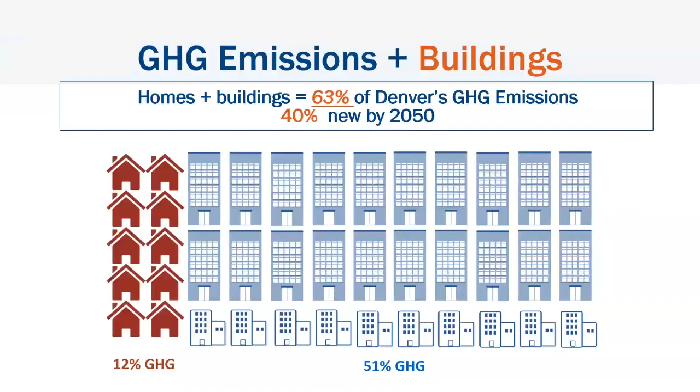So one of the big areas is through greenhouse gas emissions. We know that homes and buildings are responsible for 63% of Denver's greenhouse gas emissions, which is a lot. We also know that 40% of the buildings that are standing in 2050 will have been built between now and then. So we know that our energy codes matter a lot because our new buildings matter a lot.

That's not to say that existing buildings and cleaning up the grid aren't important. Both are. The Office of Climate Action, Sustainability, and Resiliency, which I'll just call CASR for the rest of my little talk here, is doing separate things related to getting the grid cleaned up, with a hope that we'll get to 100% renewably sourced energy in Denver by 2030. But Xcel needs our help to do that on the grid. So I'm not going to talk about the existing buildings work and grid work today. Just know that it's happening alongside the new buildings work.

Our goal through the work that we're doing with the codes and beyond the codes is to get our design and construction community acting together towards really having much better built outcomes where our buildings perform as we intended. And that involves getting performance considered from the very, very beginning on every project at the same time that aesthetics are considered.

This isn't a new concept. This is something that the AIA floated out as a core necessary piece of our work in the architectural community a couple of years ago. We're just embracing it here in Denver. We know that we can't just pass a bunch of new codes and say, okay, here you go, community, now just make it work. We know that the market and the regulations have to move along together, and so if I gave the full-length presentation of this, you would hear me say about 200 times that we're working in conjunction with the community.

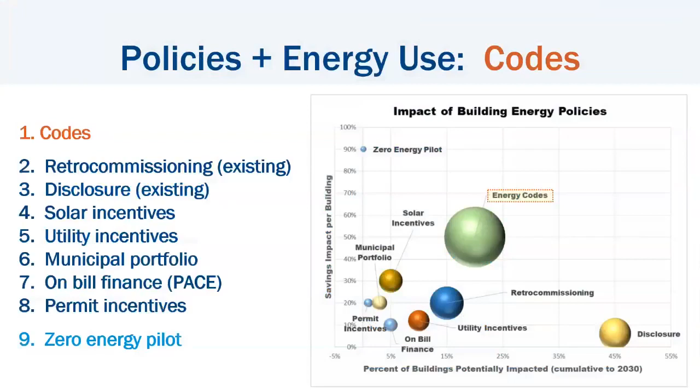The reason is because the big green blob represents all of our buildings that follow the mandatory base code. It's really important to have high-performing buildings that show us the way, that are individually going above and beyond voluntarily, but the bulk of the impact happens through the buildings that follow the mandatory base codes. So we have to focus on getting those codes more aggressive.

The CASR office pursued funding a couple years ago, and so it's worth mentioning that funding through the American Cities Climate Challenge. 25 U.S. cities that are moving faster than some of the other cities are sharing $70 million worth of funding over the course of 2 years. And as part of that, we were fortunate enough to have the Institute for Market Transformation come out last October and help evaluate how we're doing relative to IECC compliance as it stands today in our plan reviews and our inspections, as well as our built outcomes. They've made a series of recommendations to try to help us to get to better built outcomes.

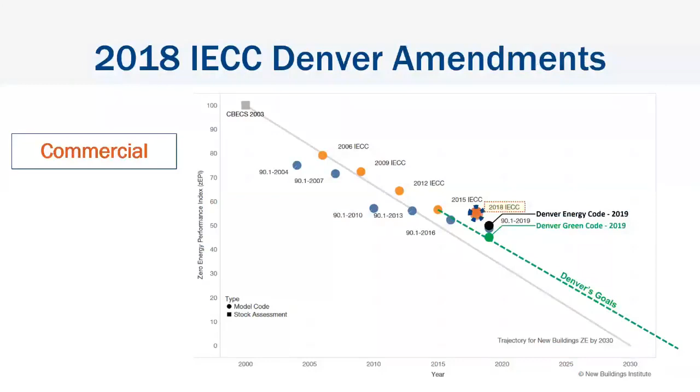At the same time, we're working on updating our codes during each of the 5 code cycles, and including the 2019 amendments to the IECC. This trajectory shows Denver's goals, and it shows that the IECC at the national level is not on track with Denver's goals. The same is true for the residential as it is for the commercial.

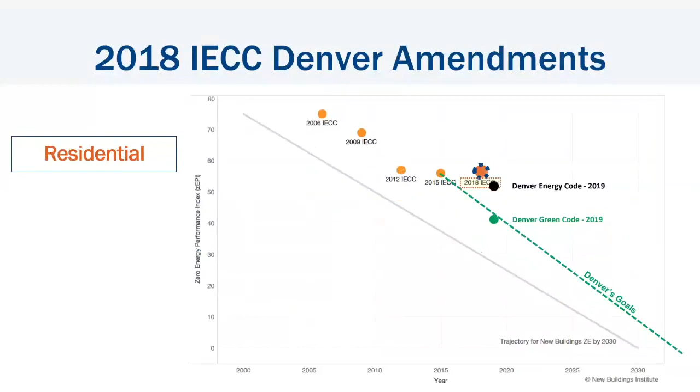Which just means that we will have to write amendments in Denver to get our codes to keep us on our trajectory towards where we want to be. So in 2019, we used the code amendment process as a learning experience, and we got to about 15% better than the national codes, but that wasn't quite enough to even get us tracking towards our goals.

And what that told us is that in future code cycles, we will have to work with the community and with our committee to figure out which amendments are the most achievable under the umbrella of a goal that we need to get to, because we know that we'll have to raise the bar 10 to 15% per code cycle to get to our goals, and we'll just have to find the right collection of amendments, not consider each amendment individually in a bubble, but consider each amendment individually in how it can fit towards getting to the goal that we have for that cycle. And it might mean that more workforce training is needed, or that there are other resources that the community needs.

At the same time, we're going to be looking at the Denver Green Code. We used this as a learning experience this go around as well. We have put a bunch of things in there. On the energy side, it pushes about 10% beyond base code. And it offers two opportunities. One is for projects to voluntarily follow a higher bar and a higher standard and show leadership in the community, but the other is a preview, because the provisions that are in that Denver Green Code are most likely to be moved to mandatory base code, or to be considered to be moved to mandatory base code, in the next code cycle. So it gives everybody a chance to know what's coming.

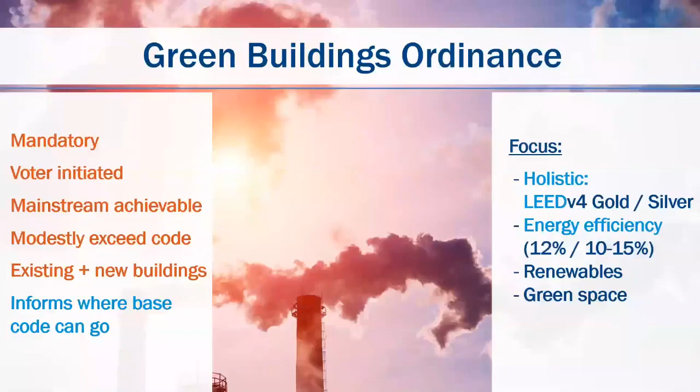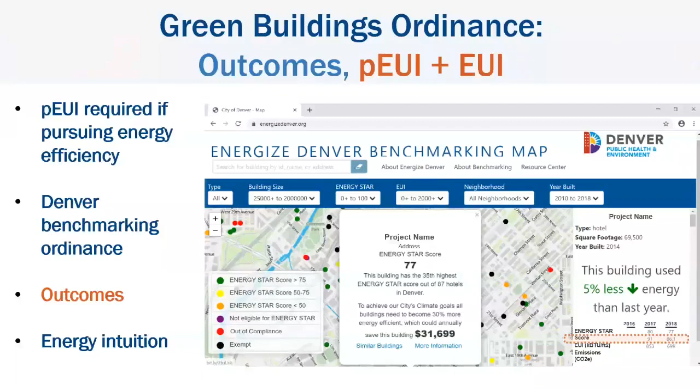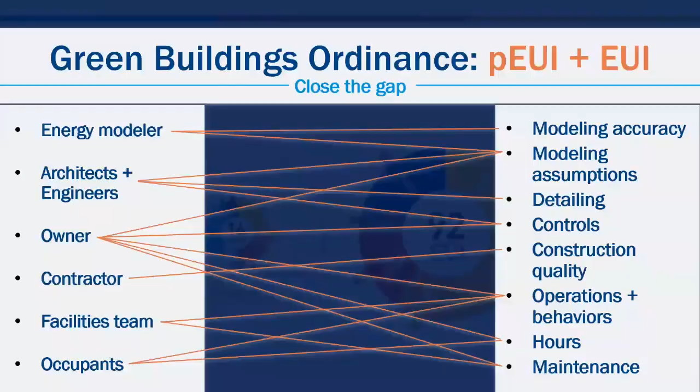The reason why we're so focused on outcomes is we've been seeing predicted energy use and actual energy use on buildings to be very different. Sometimes, we see buildings using 2 to 4 times as much energy as they were predicted to use. So there's a really big gap right now. That gap is not attributable to anybody's failure or any team member's failure. It just takes a really big collaborative process to close that gap. So we'll be working to help everybody close that gap so that we can support our community goals and the health and welfare of our citizens, all of our citizens. Because ultimately, we see the goal of equity, affordability, and sustainability as one goal. We can't have one without the others.

So there are a bunch of other things that are going on beyond our code work that support our code work. I'm not going to really talk about that, but just know that if there are things in your mind that you know are happening in other cities, we're definitely looking beyond just the codes. We know that it takes kind of an elaborate network to get to high goals.

We know that if we can take advantage of some of the opportunities at the planning level, that will set up our projects for success, easier success at the building level. So we're looking there as well. And we're looking at all of the aspects of sustainability in the design of our buildings, not just energy. Just that energy is the focus today with IECC. Ultimately, though, the big focus is how do we get all of our building projects contributing positively to the future.

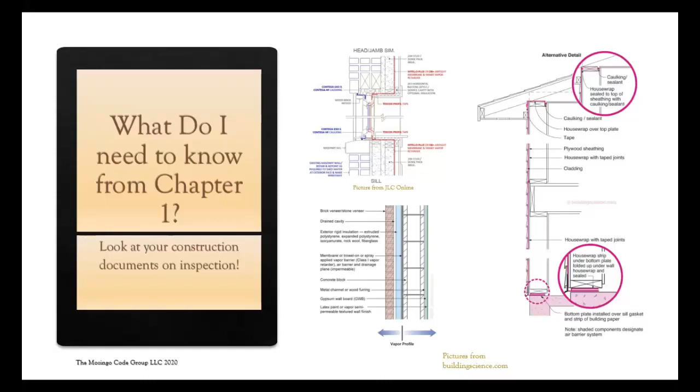Look at these details from JLC and buildingscience.com. You can see what they're using and where it's going to be, so maybe, just maybe, it will actually be constructed that way. It's important to look at details like this and see where the air barrier is, where the vapor barrier is, and what they're using, so we can make sure that air sealing detail gets done.

Because now there are blower door requirements in commercial buildings and air barrier verification we're going to talk about, we really need to make sure that, yes, at plan review it's definitely on there, but at inspection that they're doing exactly what was called for on the plan. So just make sure you're comparing the plans to what's actually being constructed in the field.

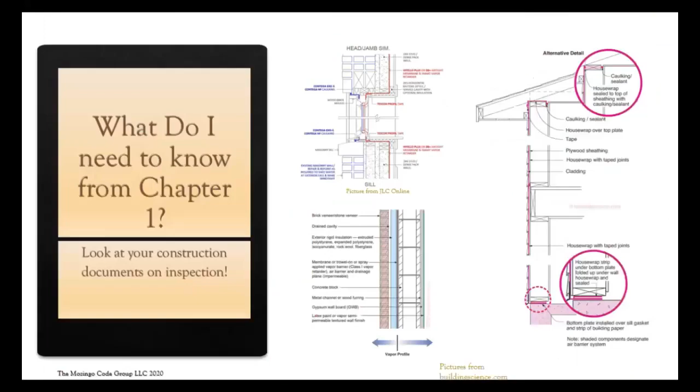Another thing in 105 is the final inspection. I know inspectors know this, but sometimes we don't just have inspectors on the webinar, so I want to point out the code says the building has to have a final inspection and can't be occupied until it's been approved. Some people don't realize that.

It goes further to say that buildings or portions of buildings can't even be considered for a final inspection until the code official has their preliminary commissioning report. You need to make sure they've got that preliminary report before a final inspection, because at final inspection you're going to be required to turn in your final commissioning report.

So these are some things in the code. The final inspection has to include verification of the install and proper operation of all the building controls, whether that's lighting or mechanical. We have to show that they are there and they work, so just make sure you have all that.

When you go to final inspection and pick up that final commissioning documentation, it comes with a checklist letting you know what errors they found and that the non-compliance parts have been corrected. That's specific, that's in Chapter 1.

It's just a good resource to have. It's good for builders to know that inspectors can call you on that, and it's good for inspectors to know that it's there and they can call it on that.

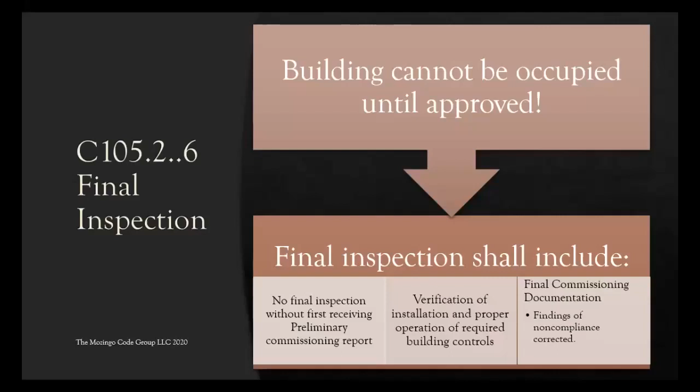So Chapter 2 has some good definitions you want to become familiar with, some new ones. If you're a mechanical inspector, you'll want to see the definition for direct digital control, DDC, because it's mentioned in 403 when you get into VAV and multiple zone systems.

I imagine it'll be the building inspector and probably the electrical inspector who will be looking at the electric vehicle requirements in the code. There are some electrical requirements for sure, but there's a lot more when you get into those electric vehicle provisions that talk about parking spaces dedicated to electric vehicles in both accessible and non-accessible spaces. So looking at the number of spaces required, there are different types of spaces required.

When we get into that, it's important to know that terms like electric vehicle ready and electric vehicle capable are defined in Chapter 2. So becoming familiar with Chapter 2 is important in this section. It's also important to know, as a commercial inspector, that the definition of a residential building has changed.

That affects you because R2s, multifamily buildings, got taken out of the residential chapter, and now all multifamilies, doesn't matter 3 stories or less, 4 stories or more, all multifamily buildings are commercial according to the Denver Code. So just making sure that you know you're going to be looking at all multifamily as commercial under these commercial requirements now. It kind of makes it easier on people to just have one set of requirements to comply with, but it is a change.

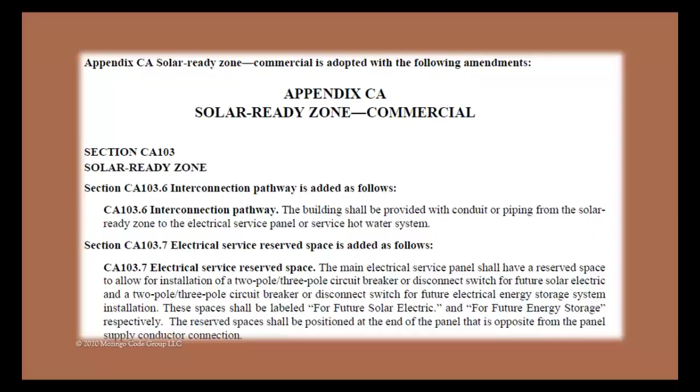So, all right, we've gotten past this appendix. We know everything has to do that. So there's options in the code for how you comply. How do you get through compliance?

And yes, that again seems like a plan review question, but it's not. There's some things in there that you need to know as an inspector, on when people have made what choices, so that you can verify them.

It's changing, and so it's important to know that. Whenever we offer options in the code, there just becomes a lot more we need to know. But if we didn't provide options, it would be really hard to get a building built. So we want to provide those options and flexibility so people can choose what works for them.

All right, so we know we have the appendix to comply with and what you have to look for. Now let's look at those options.

There's a prescriptive option. You have the option of going with ASHRAE 90.1. You have the option of going with the energy code. And within each of those, you have an option to go prescriptive or performance. So we're going to take a little look at them.

Prescriptive for this code also means things like ComCheck. So it's just important that inspectors and plan reviewers be working together right now, with the designers and with everybody, because yes, ComCheck is going to write a new version specific to Denver's amendments, but it takes a while to do that. And until that happens, this code goes into effect in July.

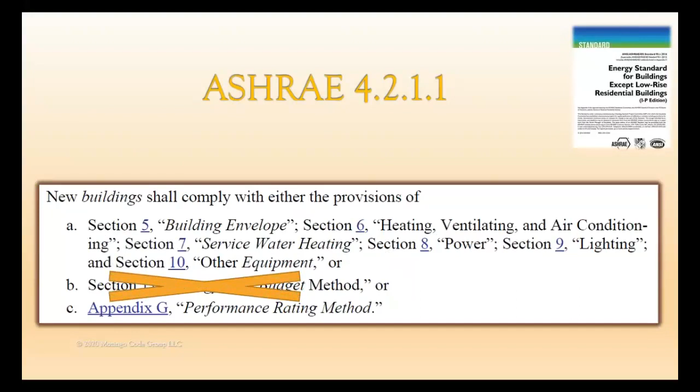So what does that mean, really? If they use ASHRAE prescriptive, you just have to make sure that they went above the minimum in two of these areas, right? Hopefully it'll be called out on the plans which two they chose, because they have to choose two of these in order to be equal to ASHRAE or to IECC. Somewhere on the plans they'll identify which options they chose, and you'll just need to verify that in the field. They have to choose two.

Typically people would normally pick mechanical and lighting options. It's not as hard to go with 75% of the lighting being higher efficiency or higher efficiency mechanical. But with the new requirements that you have to do blower door testing and air barrier verification most of the time now anyways, option one might be just as easy to choose. So it'll be interesting to see what designers do.

I like how Christy touched on how they're going to kind of keep track of what's working and what's not, and always take that into consideration when they're moving forward. I'd like to see this part being tracked to see what are the most popular choices, what are people choosing, why are they not picking the other option. These are just good things to know when you move forward with new codes.

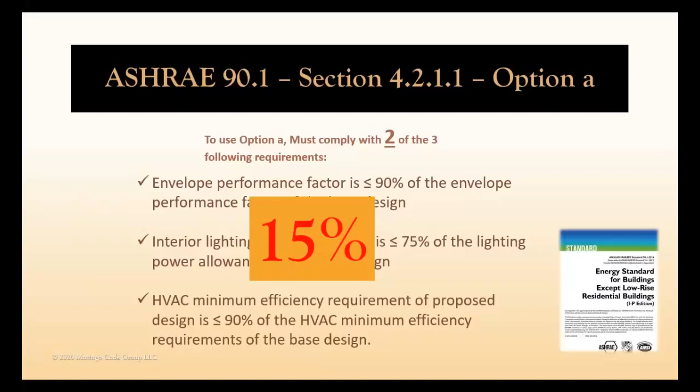There is an option to go prescriptive out of IECC, which also requires that you follow the mandatory items in the code. That's always been the case, since IECC and ASHRAE both have their own mandatory requirements. If you're going with ASHRAE for the Denver code, you do their mandatory requirements, but you also do the air leakage and commissioning out of the IECC. But when you're in the IECC, you do all of those mandatory requirements no matter what path you choose. Mandatory just means you can't trade it off—these are things you have to do no matter what.

I know the word mandatory kind of messes people up, but it really just means these are things that can't be traded off. So the path hasn't changed a lot, other than being sure you follow Appendix CA for the Denver amendments.

We're going to look at those Denver amendments, but I want you to see what's going to be required as an inspector if somebody chooses IECC prescriptive and those mandatory items too. The first part is complying with C406, the additional efficiency packages. We'll look at it in more detail later, but just know you have to choose two of these packages. This was originally put in the code in 2012 to get more efficiency out of a building, while giving the designer and building owner the option of how they get that efficiency.

Each cycle more options are added to the list. We started with 3, then went to 6, now we have 8. With the Denver amendments, you just have to make sure you choose 2 of the options instead of 1. This is mandatory if they go prescriptive, including ComCheck. Until ComCheck catches up with the amendments, you'll need to look over the plans to see which 2 they chose and verify they actually completed them. ComCheck has a place that tells you what they chose, but only a place for 1. So you have to make sure you're looking for 2 until the new ComCheck comes out. With these 2 options, you could be looking at about a 15 to 20% reduction in efficiency if they're not done, so we really want to be sure we're getting these verified.

There are different options, the same as what's in the code. The only amendment is that you choose 2 instead of 1. You could go with 10% more efficient mechanical equipment, 10% more efficient lighting power density or better lighting controls, a dedicated outdoor air system which handles your ventilation separate from the heating and cooling equipment, a better water heating design or some solar thermal, which only applies to buildings that use a lot of hot water, not everybody's allowed to choose that. You could do some on-site renewables, and it has to be on-site.

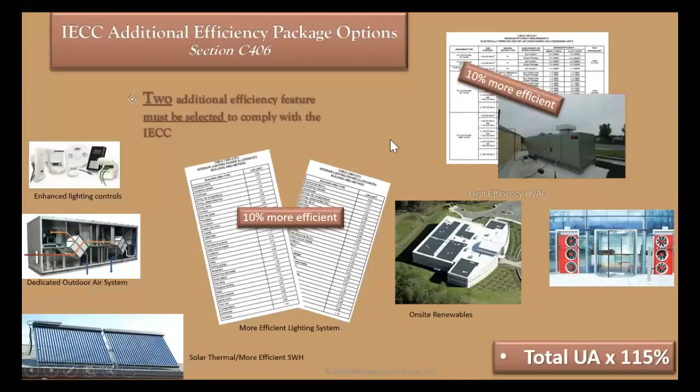So just make sure you're aware they have to choose 2. Somewhere on the plans it has to be identified. I'm sure Denver has amazing plan reviewers, so I'm pretty sure they'll make sure you know what was chosen.

IECC also has a performance option. C407 is the performance section of the code that tells you the difference between the standard reference design and the proposed design and how you calculate that. But you still have to do the mandatory options, including commissioning. You would inspect from the plans and the performance report, which should match, but sometimes they don't, and sometimes plan reviewers will just send the extra documents with the plans instead of making designers put everything on the plans. Denver's pretty good, though, they have some energy sheets they require, so they do a pretty great job of verifying energy.

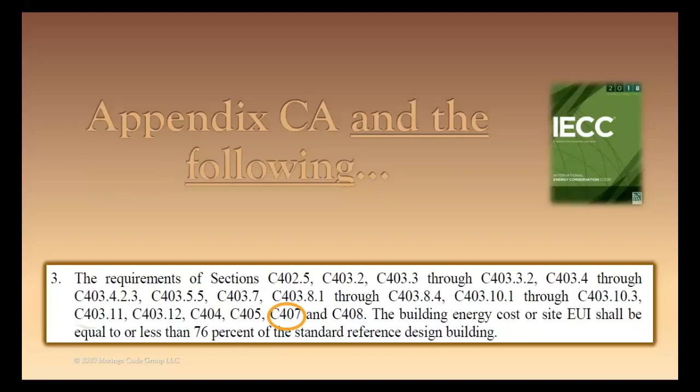So it's important to know what's mandatory and can't be traded off, and to look for that. Let's walk through that, because there's a lot that's mandatory. 407 is your performance path, but everything else is your mandatory requirements. And if you look at it, don't forget you have to do your air leakage.

That's 402. 402 is always envelope. 403 is mechanical, so look at all of those mechanical requirements, right? And then 404 is water heating, 405 is lighting, and 408 is commissioning. There's a lot there. We just kind of want to walk through that because we don't want to miss those. You're going to be needing to look at them.

So for the envelope, a lot of stuff there, right? Air leakage is mandatory in any compliance path in just about any code. We're going to dive into this a little bit later to see how it affects inspections. I just want to point out that many times when someone uses the performance path or a trade-off path, they use a third party for verification. So you want to be sure that they are looking at these mandatory items, including them in their model and in their report. No matter what, you'll need those reports that we'll be talking about in a few sections.

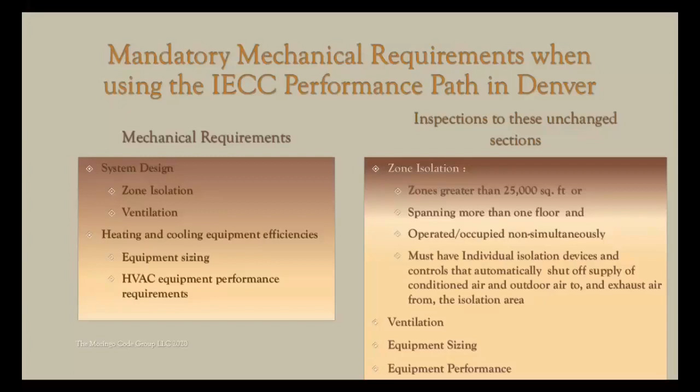So I think that a lot of times things change, what you can buy or things change as you're under construction, and we're not making them go back and redo their load calcs or redo their COMchecks or whatever, to make sure that it still passes when things change in the field. And so it's important to make sure that those match.

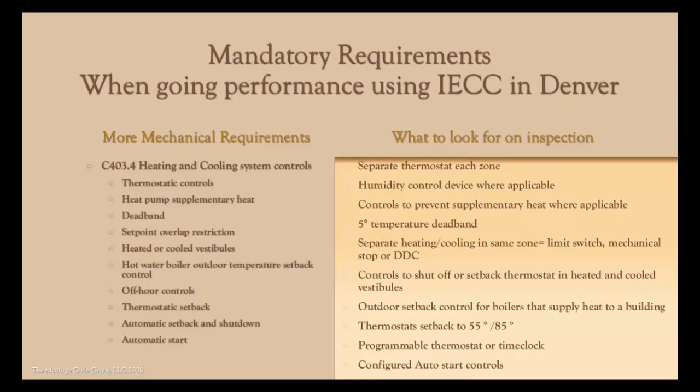Or is Jane going to go turn up the thermostat and then John is going to go turn it down? Everybody plays with it, and pretty soon there's no efficiency to be had because it's been messed up. So it's important to verify these control requirements. There's a lot of efficiency to be gained right there in those requirements. So I would just challenge you to take a couple times to open some thermostats and look in them just to see.

Some more mechanical. You noticed on that list there's a lot of mechanical.

So economizers, fault detection, huge. It's easy to climb on a roof and see if there's an economizer on a rooftop unit. You can see it from across the roof. But do you open it to see if it's hooked up? Do you open it to see that it's got its fault detection device? Do you look to see that everything's hooked up and that it's working? Because economizers are only good if they work.

And so demand control ventilation, do you have CO2 sensors, or you have your parking garage ventilation where you're not just bringing in a billion CFM because it's a big parking garage, but it's shut down and it's never going under the amount of CFM that would make it hazardous, right? There's always going to be sensors and things to make sure that it's not hazardous. But are those things being looked at?

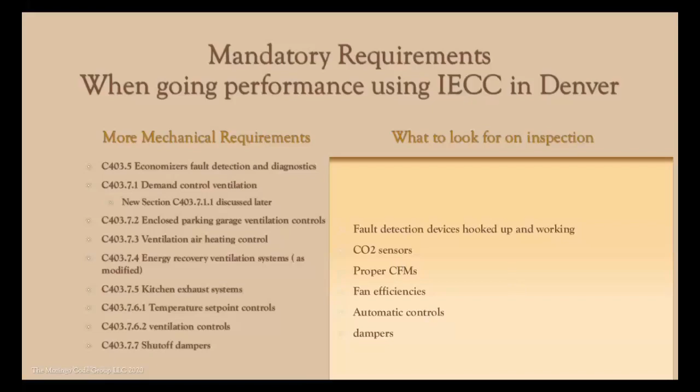These are the things I put over here to look for on inspections, the things that I'm finding people are having trouble doing. The efficiency, those are big old fans sometimes. What are their efficiencies, right? Do they have their controls? Do you have your automatic dampers? So there's just some things in there to make sure that you're really looking at. Those are mandatory requirements that can have a huge effect on a building. So looking at that.

Some things that are harder or less common to look at: I hardly ever see anybody crawling down to see what is the horsepower on the fan motor to see if it's within the limits, right, or the brake horsepower, or what was the efficiency of that fan. I've just not seen very many people willing to do that. It is a code requirement. It's a mandatory code requirement.

But let's look at refrigeration equipment performances. Those are pretty important. Making sure that your coolers and your freezers are airtight. They're insulated. They have the right lighting controls, so they're not just on all the time. They shut off when somebody leaves or when customers aren't there trying to buy something, if it's those display type cases. So those are pretty important. You can imagine walk-in coolers and freezers that don't have an airtight seal around the door, where you could be wasting a lot of energy. So some things to make sure you're looking at there.

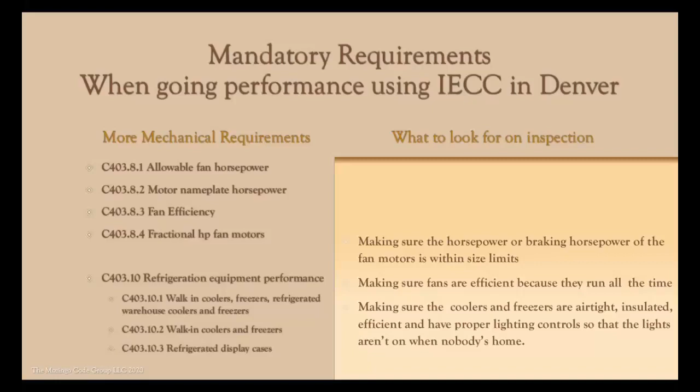And of course, you're always going to have your duct system. Is it properly constructed? Are all the ducts sealed? That's mandatory, that all the ducts are sealed. There's still not a requirement for a lot of duct testing in the commercial section unless it's a high pressure duct, but duct sealing is still mandatory.

Duct insulation, if it's outside the envelope or within the envelope, there's just different requirements, so making sure that that's met, and your HVAC piping insulation. We're not talking about service hot water piping. We're talking about the piping on your mechanical equipment. Is it insulated the way that it's supposed to be? Those are pretty easy things to verify on an inspection usually.

And then, of course, anything outside the building. Your heating outside the building, your snow and ice melt, your freeze protection, do they have their automatic controls? It seems minimal, but just picture a snow melt system that has this huge boiler running all the time because it didn't have a temperature sensor to say, oh, it's warm enough outside to melt the snow, so I don't need to run. Or the sidewalk is warm enough, I shouldn't be running. It's this boiler that's just running all the time. Huge energy efficiency waster, right? So just making sure that those controls are on there.

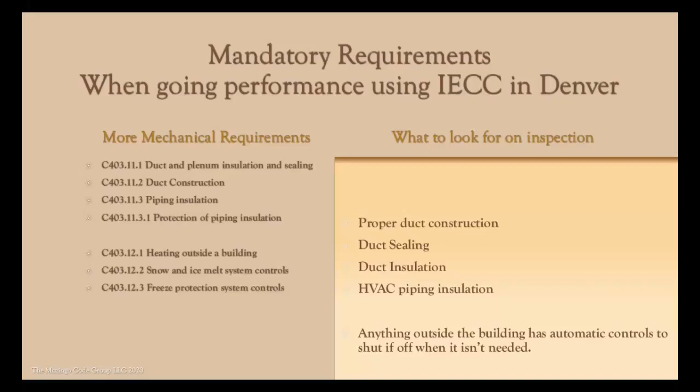That's not a new requirement, but we just need to look to make sure they're there. Service water heating requirements haven't changed, making sure that you have your heat traps, your piping insulation, and the right efficiencies of your equipment.

Very rarely do I see the water heating supply piping requirements enforced, where you either have to do a certain amount of volume through the pipe or a maximum distance for your piping from the fixture to the source. Very rarely do I see that enforced, but it is there.

What I see is Denver has an amendment for your water heating system that says if you have those big, huge water heating systems over 1 million BTUs, this is in the code, but there are some Denver amendments to it. If you have these big systems that have to heat water, this is your service water heating system, not necessarily for conditioned space, but for the water heating.

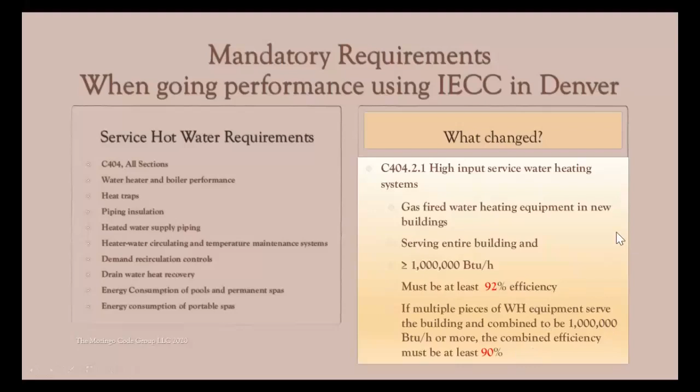If you have those big systems, they need to be high efficiency. And if you have a bunch of pieces of equipment together to equal that 1 million BTU, you need to at least be 90% efficient. So you need to think about efficiency. That's a requirement in there that you need to be looking for.

Lighting hasn't changed a ton. You're always going to have your controls. Lighting controls is huge. The lighting power densities, the light bulbs we're using these days are kind of taking care of the lighting itself.

We used to be worried about all those old light bulbs that put off so much heat they added to the load, so we had to cool even more because those light bulbs put off heat. That's kind of taking care of itself with the new technology, right? We have lower wattages being used, and that's great.

We still keep track of it so that we're being diligent in that process. But where more of the lighting in the studies I've done is being messed up is on the control, and that's the problem with inspection of lighting.

Who does it? Is it the electrical inspector? He or she may be looking at how things are installed and whether they work and are appropriate, but are they looking at whether this room required an occupancy sensor and this one required daylight controls, and that they work together and this occupancy sensor isn't messing with the daylight control? Is that being looked at a lot of times?

A lot of times on electric plan review, you have to decide who's going to look at the energy code requirements. But on inspections, what I have inspectors tell me a lot is, 'I'm an inspector, I inspect to the NEC, that energy code is not my code.' And then if you go to the building inspector, they're saying that is electric.

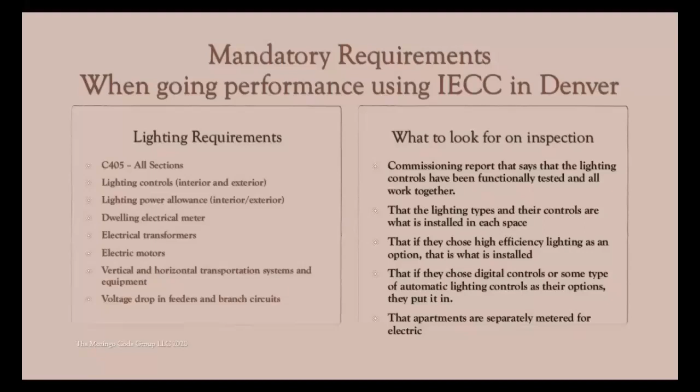Commissioning is a mandatory requirement in the code for all paths. Make sure you're looking for that preliminary report. It's supposed to be done at a final mechanical inspection, and then before final building, you get that final report and that commissioning checklist. Denver has amended the commissioning checklist, so make sure you're getting the right one that's in the code in C408.

You're not going to be out there doing the commissioning, and there's specifics on who can do that, but you're just looking at the report. Did you get those reports and turn them in?

Commissioning is huge. When you have big, huge pieces of mechanical or hot water or heating equipment, it's important that the owner is getting what they paid for, and that somebody is looking at all of that and making sure it all works, noting where the settings were set on each thing, so that if enough people over time mess with the controls, it doesn't stop working.

I've talked to commissioning agents, and they say if you come in after the fact and try to troubleshoot and figure it out, it's tens of thousands of dollars to figure out what went wrong. But if you've got a manual that says when it worked, here's where everything was set, here's our sequence of operation, here's everything you need to know, then at least you can go back to that starting point where everything worked. So it's so important to get that.

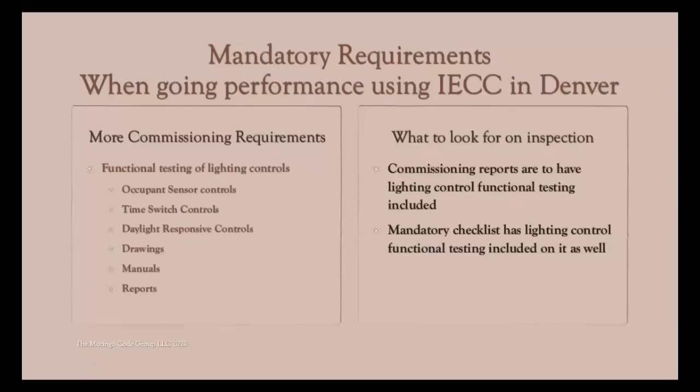Then I just wanted to give a brief on ComCheck. Denver, or ComCheck PNNL, has agreed to write a ComCheck for Denver's amendment. It's in the process, and it takes a long time to write that, so you will be able to see that for Denver eventually, but as far as I know, it's not finished.

So you're going to need to make sure you're looking for those two efficiency package options and the amendments for the window U-factors and other things as they are now in the amendments, not what a typical ComCheck would show. You could get a ComCheck to pass right now in Denver, but it's looking at the code unamended, so you wouldn't be able to take that pass at face value until they change it.

So it's really going to be important for plan reviewers and inspectors to work together to make clear what's required and what's being chosen. It's also important for designers to put this on the plans so we can see which two options on 406 you chose, what kind of lighting and windows you chose, because the program isn't going to be caught up yet.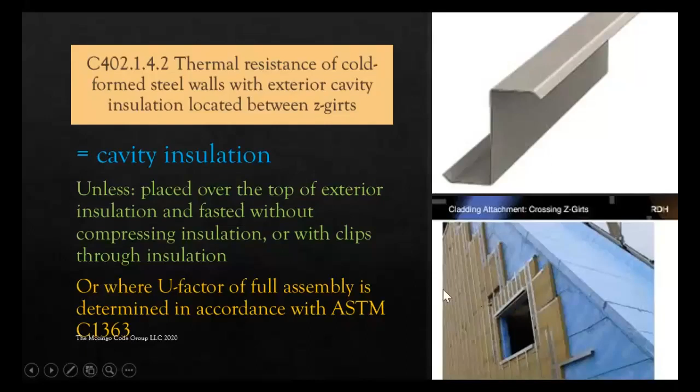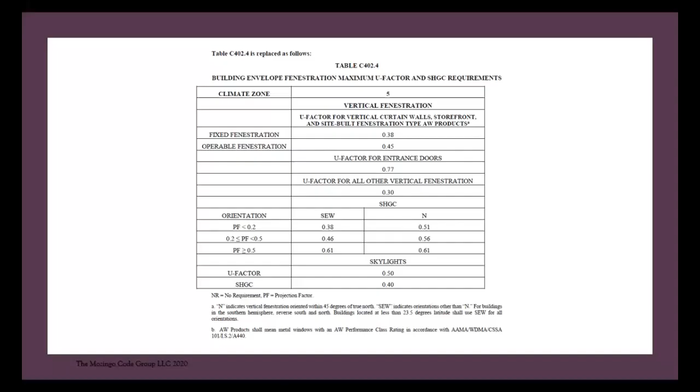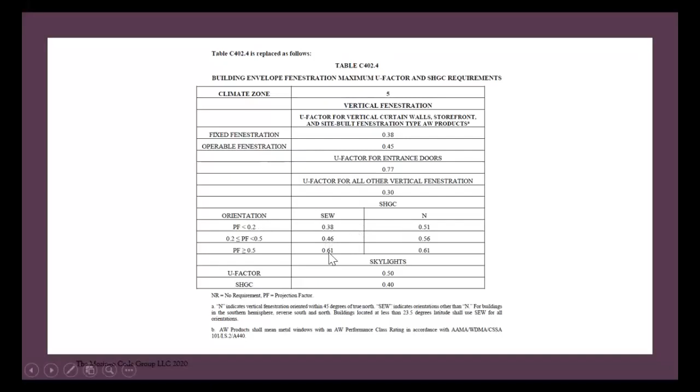So they say they put in a worse window because they have this big projection, and you go out there and there's no projection. Sorry, you need to put in a better window. That doesn't mean we're going to automatically make them yank out their window. It means you need to redo your calcs, redo your comp check, redo your performance report, and make sure you still pass. But you didn't put in as good of a window as you could because you said there was a projection and there isn't one.

That's all. Windows have a huge impact. Solar heat gain coefficient has a huge impact on the size of equipment that goes in there. How much heat is making it through this window? The air conditioner is going to have to offset that. So windows are hugely important, and in commercial buildings we use a ton of windows.

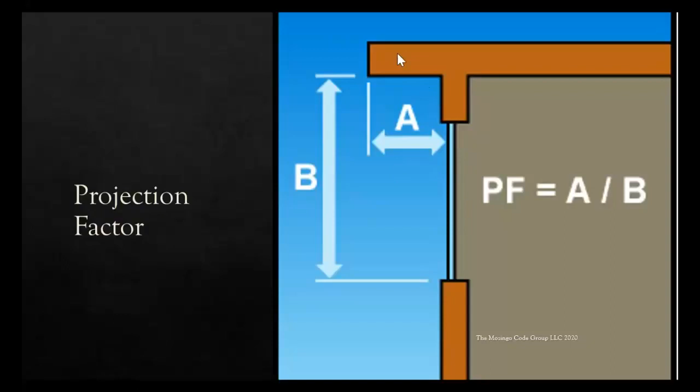I would say in a climate zone 5, it's as important, if not a little bit more, than the U factor. So make sure that if they say, we're going to put in a worse solar heat gain because we have a projection, that they really do have a projection. I just want to point that out.

All right, let's talk about the envelope. Denver's really putting a lot of thought into this. It's great. The 2021 code is going to have a lot of this in there too, so you're going to be a step ahead. But Denver's doing a lot better even than the 2021 for the most part.

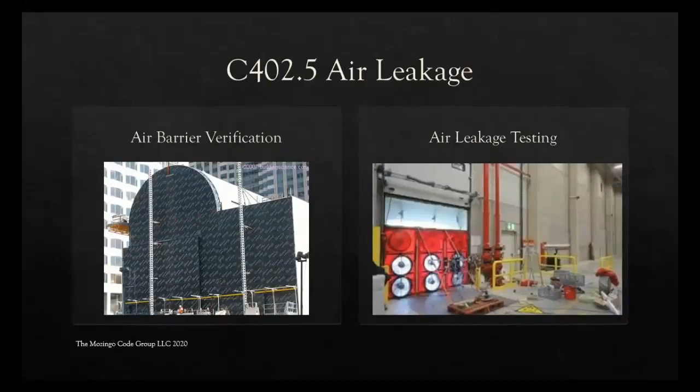So let's look at this. There's been some thought, and I love that this is in there, because a lot of people got a parking garage with sprinkler pipes running through it, and they're trying to figure out how to keep those sprinkler pipes from freezing. I see all kinds of things. People say, well, I'm going to heat that. I'm going to build a plenum and heat it. Oh, you have a heated space. Guess what? Now you have to meet the envelope provisions.

Now you have to do insulation and air barriers. Oh, but I don't want to do that, I want to have a drop ceiling so I can access those sprinkler pipes. Well, you can't put insulation on a drop ceiling without an air barrier, and if you just met the code, it's almost impossible to do. So Denver looked at that and said, wait a minute, is there a reasonable way to handle this issue? And I think they came up with one, and I really like it.

They're just saying, okay, you don't have to put that air barrier down. You can heat this space and get your insulation values, but you need to put a minimum of R5 on the slab and a total of R19 in the floor. And if you do that, you can do away with the air barrier. That layer of R5 insulation on the slab is going to serve as your air barrier, pretty much.

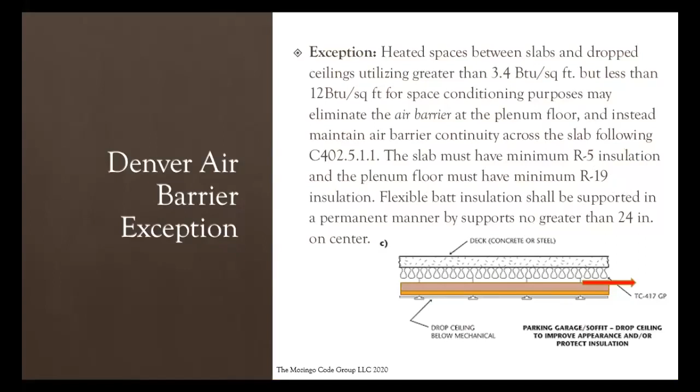I shouldn't read code at 5 in the morning. That's what that teaches me.

All right, so air barrier compliance options. If you're an I occupancy, you still have the option of doing the material option, the assembly option, or actually testing it. If you're anything else, then you're going to do air barrier verification.

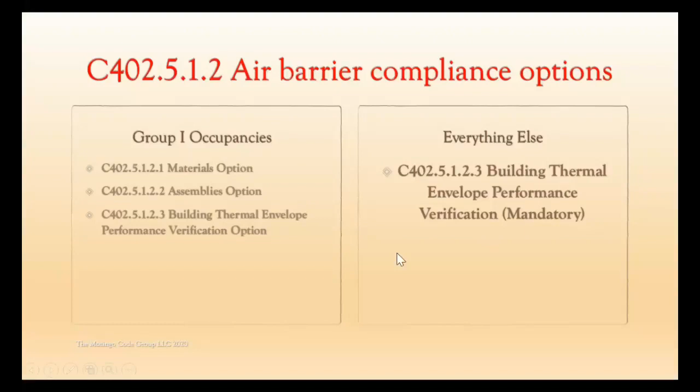So let's look at what that means. If I'm Group I, I still have this option of making sure that the materials I choose are sealed and continuous. All of these different materials in the code you can still use; they're deemed to comply as long as they're sealed. Just making sure that if you choose plywood, it's 3/8 inch, but are you sealing that plywood? Are you sealing it up and making sure you're sealing everything? Otherwise, that's not an air barrier. But you still have this option, only for Group I occupancies.

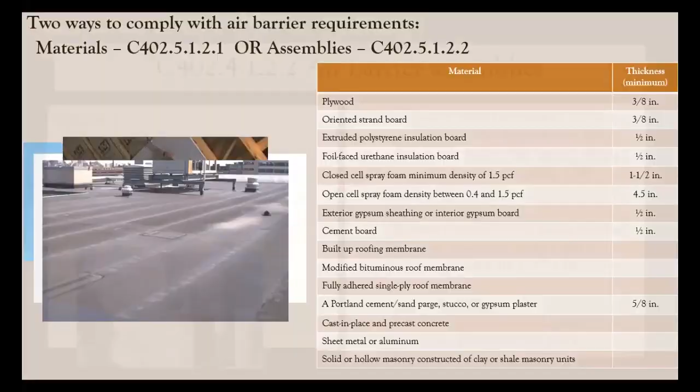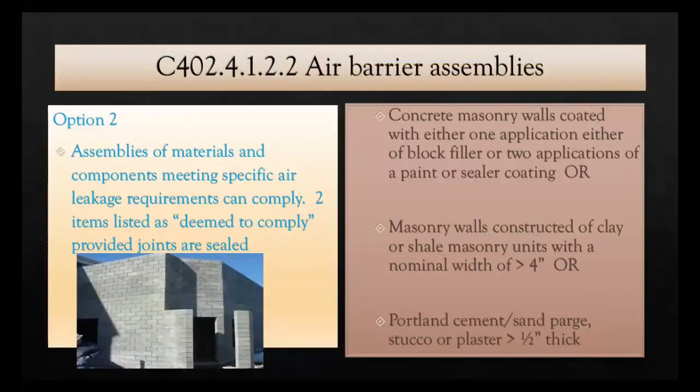Or you could do the assembly and materials components. So if I have an assembly, concrete itself is permeable, so I need to have some coating, plaster, or stucco. I have to have something on there, but the total assembly is now airtight, so I still have that option. The problem is when you get into buildings, it's really hard to see where your air barrier is going to be continuous.

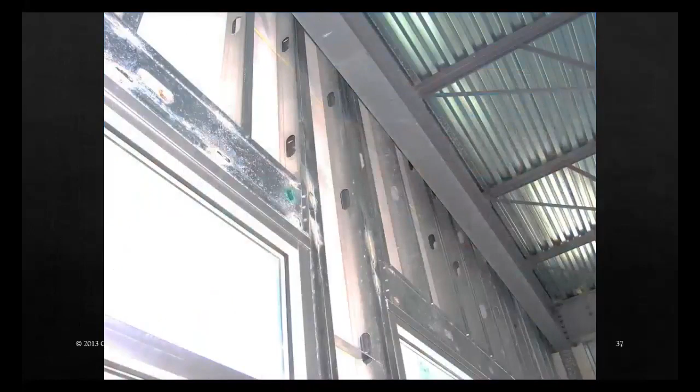I get these buildings, and it's hard to verify where my roofing membrane on the top is going to meet and be continuous with whatever I'm doing in the wall, and how I'm going to get a continuous air barrier in some of these locations. It can't be an afterthought. So making sure that you're getting those.

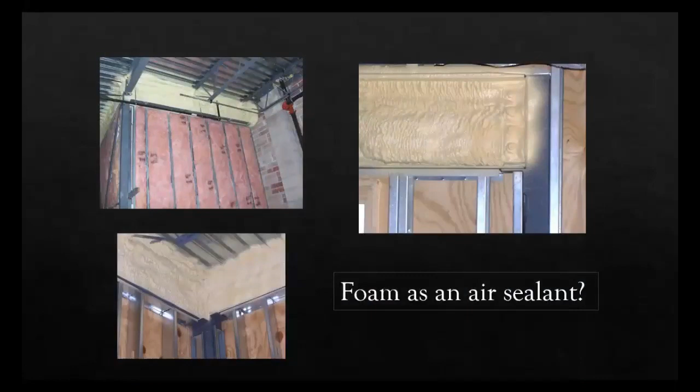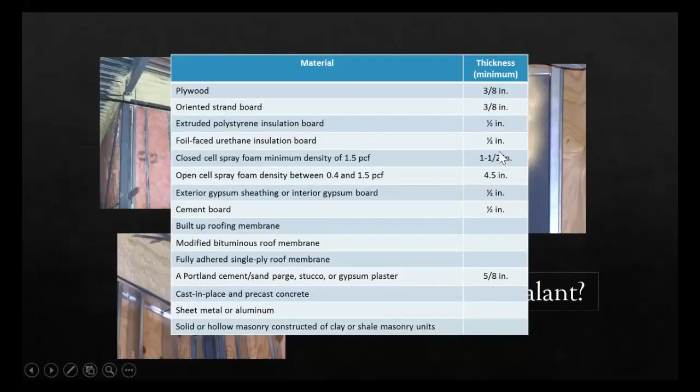A lot of people use spray foam as an air barrier, which you can - that's totally fine. It's just that, remember, to be an air sealant, if you look back in the code section, it says I can use open cell as an air sealer, but I have to have 4.5 inches of it just to be the air sealer. I can have 1.5 inches if it's closed cell foam. So just making sure you're looking for those products. It can't be an afterthought.

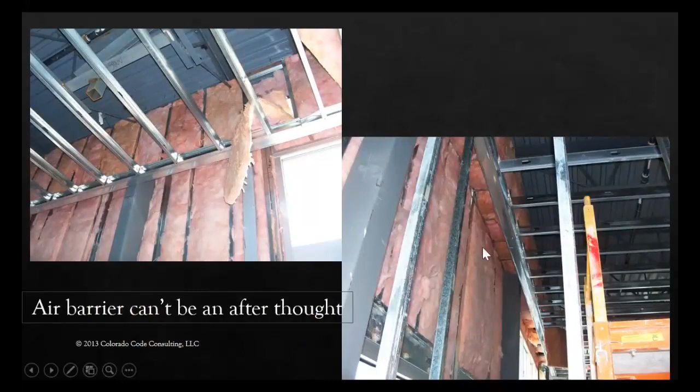You've got to get air barriers where they need to go before you start doing all this after framing, and it's too hard to get up there. Things like this are - we can't have this situation where, how am I going to get that air barrier up there? This insulation isn't going to do its job without its air barrier. So making sure that you get that done.

As an inspector, and designers, there's some good resources out there - go to all of the insulation and air barrier manufacturers' websites. They give you, here's all the different things we've tried, and here's what we found works and doesn't work. You can say, oh, we tried fluid-applied Tyvek on Texas A&M, here's the challenges, here's the solutions we found.

Utilize the resources. A great resource as an inspector that I've had to use is the Air Barrier Association of America. You click on air barrier, and it gives you every manufacturer of air barriers out there, with all of their install instructions and specifications. So that's an awesome resource out there.

But air barriers are still hard and not being verified. So Denver has come up with requirements that you look at your air barriers being continuous. They have to be continuous, and somebody needs to verify them. It says the installation of a continuous air barrier has to be verified by a registered design professional or approved agency. You review the construction documents and supporting data to make sure they've called it out and put those details on there.

Inspection of the air barrier and assemblies have to be conducted during construction while it's still accessible for inspection, so you can verify that any needed repairs have been made. Then that final commissioning report has to be completed - the building commissioning, the air barrier commissioning report - done by that registered design professional or approved agency and provided to the building by final inspection. The report has to identify deficiencies found during the review of construction documents and inspections, and details of corrective measures used.

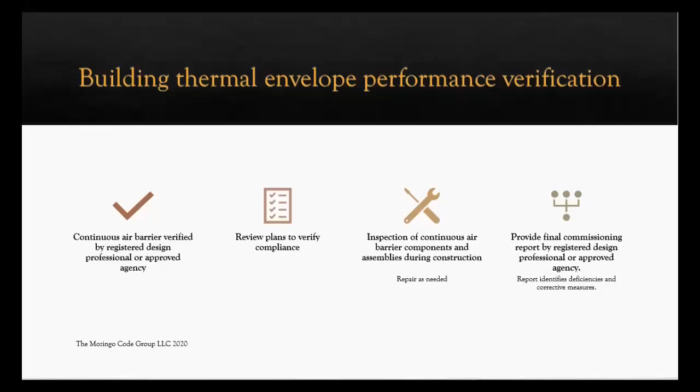But if you don't have to test, there are some buildings that don't have to test. So if you don't have to test, you have to do full air barrier verification. So just knowing that is new to Denver, this verify your air barrier. It's that important.

So building thermal envelope does have to be tested in accordance with ASTM E779. There's some lenience here, like if you're over 0.4, it doesn't mean you automatically fail, like, okay, go redo everything. It means that you're going to need to do a smoke trace or infrared or something, find out where the leaks are, see if there's any measures that can be taken to fix it, and then provide a new report saying what you identified and what you fixed.

Yes, this says, okay, well, maybe I don't have to meet 0.4 CFM then. Yeah, well, you're going to have to go through a lot more time and testing and stuff, and it would be more worth it to pay attention to the details up front. The idea is that you pay attention to the details up front, then you don't have to go through these extra measures. At some point, you won't have this leniency, so this is like a step.

So I would just say that it's better to pay attention to all the air sealing up front. That's why there's verification on that air barrier, right? Somebody go make sure you put it in right, because you've got this blower door test that you're going to have to do now on commercial buildings.

So you don't have to test the entire building envelope where the following are tested. So this is just saying you don't have to test the whole building. You do have to test anything under a roof. So if you have a multi-story building, that top floor definitely has to be tested. Or if you're one story, the whole floor, or you have mixed levels. Anything that has a roof over it, anything that has an entrance or a loading dock, or if you're below grade, those have to be tested.

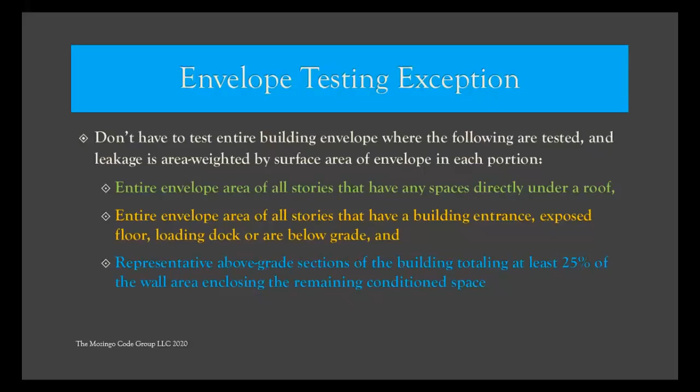And then everything else is kind of a representation, an area-weighted average of at least 25% of the wall that encloses conditioned space. So just know that that's in there.

Rooms with fuel-burning appliances. This hasn't changed a lot. It's just saying that if you have the Denver amendment, right now the code changed to just be if you have fuel-burning appliances and you bring in combustion air, you need to separate them from the rest of the building, and it's just talking about the appliances used to heat and cool the building, and Denver said plus water heating. Right? So water heating, do you like that? Yeah, that's nice. Space conditioning and water heating.

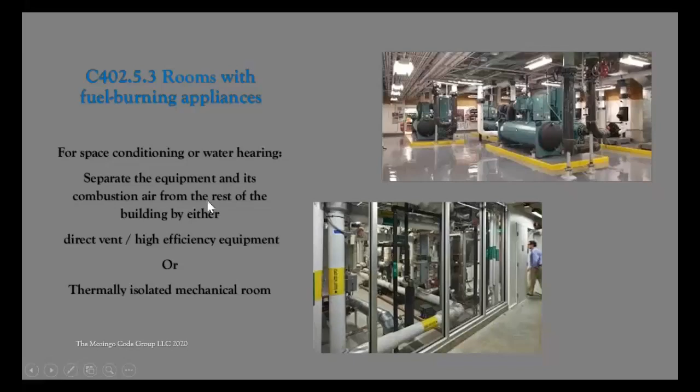So if you bring in combustion air, put that inside of a room and thermally isolate it so that you're not dumping that air into the rest of the building, or put in high-efficient equipment that is direct vent, and the air comes in, goes into the equipment, and is exhausted directly out. No air changes place with the room. So that has been in the code for a long time. The difference is Denver added water heating equipment.

Now, when we get into mechanical, we're just talking about a few things that Denver has changed. It's just really looking at the control of the flow of the outdoor air. So if you think about, like I said earlier, the energy implications of all the air brought into the building, the mechanical heating and cooling has to make up for that, right?

So my research has shown that in commercial buildings, one of the highest contributors to energy costs is the amount of outside air that we're bringing in and the equipment that has to offset it. Doesn't mean we don't bring in air. It just means that we turn it down and that we don't need as much, or we control it. If I have to bring in 5,000 CFM of outside air at the temperature that it is outside, my air conditioner is going to have to offset that, right?

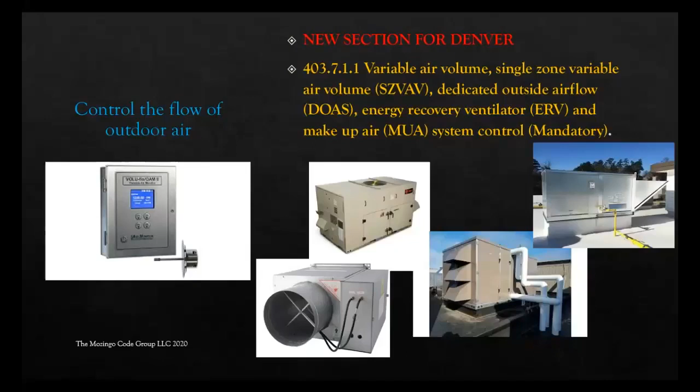So why not? We're going to design, again, according to the mechanical code, but we're going to control that air. So it's just saying when you have this equipment, whether it's a DOAS or a VAV or energy recovery, whatever, your makeup air unit, you're going to have to put some type of equipment on there to control that's designed to provide fault on excessive outside air and display or report to the DDC, maintain, measure flow rate. So it's just making sure that we are looking at that control air. So that's specific to Denver, something to pay attention to.

The energy recovery ventilation systems is important. There is an amendment for Denver on this. So we've always required if you bring in a lot of outside air, you need to put it through this energy recovery ventilator so that it kind of feels like it's tempering. It runs that hot air across the heat exchanger, pulls the heat out, so you're bringing in cooler air, or vice versa in the winter. Energy recovery also deals with some humidification issues, but usually it only applies to fans over a high rate.

But Denver amended it to also say that if you have exhaust that exceeds 3 times the value, so whether you're bringing air in or taking air out, it will apply. And so those are some things that you're going to need to look at. I usually put a video in right now of how to inspect those energy recovery ventilation requirements, but we're not going to have time to do that. So just make sure that you are familiar with this requirement for Denver on ERVs.

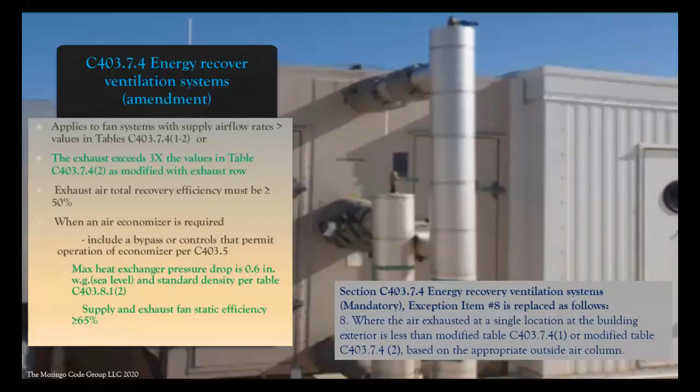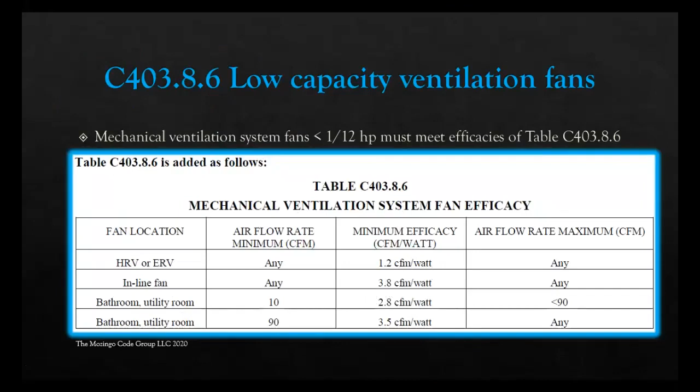And then fans, if you have a low capacity ventilation fan that's used for your mechanical ventilation, doesn't mean every single fan out there. It means the fans used for ventilation, this is the efficacy of them, right? So if you're using a bathroom fan as part of your ventilation system, here's the efficacies required, HRV, inline fans. So that's in there.

And I am really proud of Denver and the marijuana grow facility folks that really worked together to come up with a lot of the requirements that made it into Denver's code, whether it were for mechanical or lighting, because they really went through a lot to get some requirements in there. And so there's just some new requirements for indoor agriculture operations. Doesn't mean it has to be for those grow facilities, but that's why we're putting it in there. So it's any indoor agriculture operation.

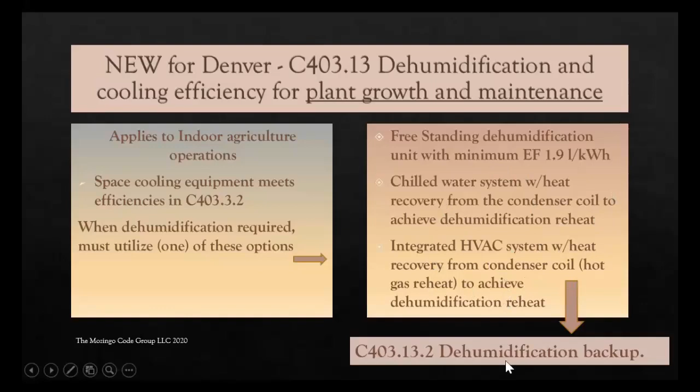Your efficiency of your cooling equipment has to meet the right efficiencies. If you use dehumidification, which most of them do, then you have a separate freestanding dehumidification system, chilled water system with heat recovery, and then it's just asking that you really deal with the dehumidification system that can use a lot of energy and making sure that you're taking all of that into consideration. You will use dehumidification, so make sure that it's efficient and appropriate.

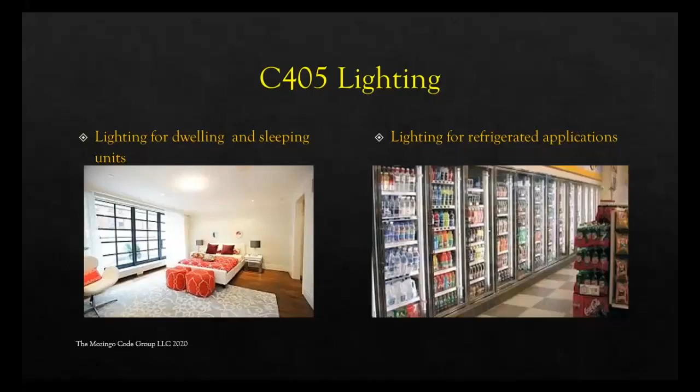Lighting didn't change a lot. Lighting for dwelling units, there's a requirement that not less than 90% of the permanently installed fixtures are high efficacy, and the definition of efficacy did change, so pay attention to that. It's 65 lumens per watt. And then lighting for refrigerated applications, that didn't change. It's always been buried kind of in that mechanical section. So Denver put it in the lighting section too, so that you know that it's actually there. If you have lighting installed for walk-in coolers and freezers, you have to have the right lighting controls and the efficiencies.

And then exterior lighting controls: provide controls that shut the lights off when there is daylight, or reduce it by at least 30% from midnight to 6, or an hour after close of business to an hour before opening, or 15 minutes of non-activity, or put a time switch control. Somehow control the lights so they're not on when they don't need to be. And there is an exception, like if I come out of this dark parking garage, I don't want a bunch of bright light, and so there are some exceptions for lighting required for adaptation.

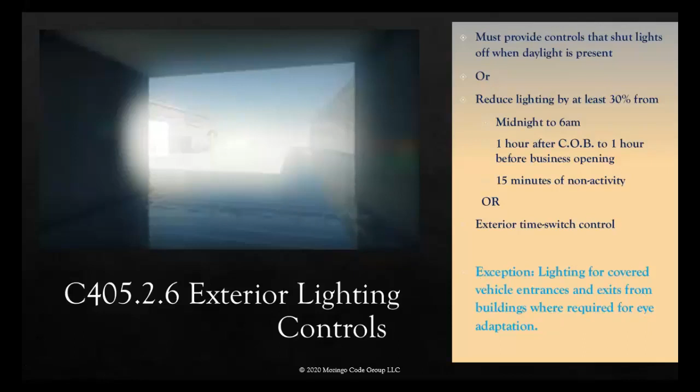And then parking garage lighting controls, just making sure, you have this big, huge parking garage and look at all the lights on. Do they need to be on all the time? Or if they do, we want to get security. We're never going to interfere with security, ever. The code won't let us.

It makes sure that there are provisions in there that we can never interfere with security. That's great, and egress. But does it have to be on full blast? Can we shut it down? Can we shut some of them off and leave some of them on? We just want to make sure that we've put some thought into this, right?

That you have a lighting zone that's no more than 3,600 square feet, so that you're controlling the lights in a smaller section at a time and not for the whole thing, and that they have controls that shut them down when you don't need them. And during the day it can be still really dark inside the parking garage. Great, turn those lights on when they're needed. But next to any of these openings, you don't need lights on because you got daylight coming in. It's just making sure that there's some thought.

How do you do this on inspection? Who's going to do this? Is this the building inspector or the electrical inspector? So we've got to figure that out and look for those controls. But just know that the lighting controls still have to be functionally tested.

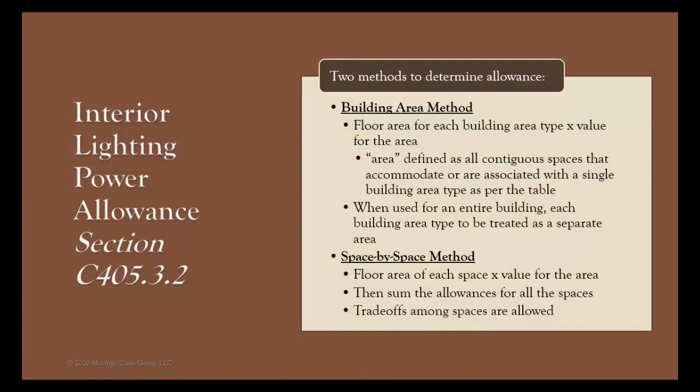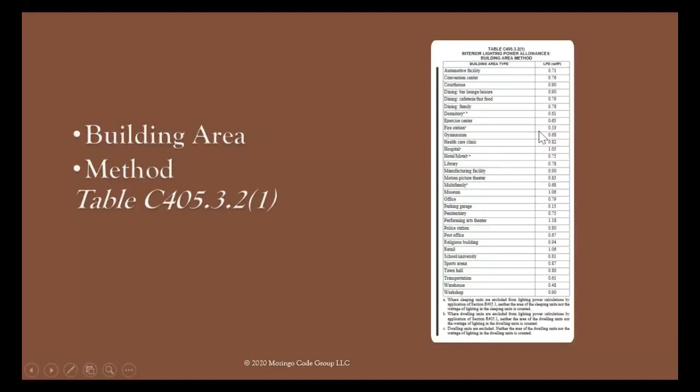All right, lighting power hasn't changed a lot. You still have the two methods. They can go a building area and space method. I don't get into this too much with the inspectors. It just says, building area method, what kind of building are you? Here's how many watts per square foot you are. Just know the plan reviewers jump through a lot to make sure that every building has the right amount of lighting. And same with here, if you're doing space by space, it breaks each space out to say, okay, here's how many watts per square foot each type of space is required. So they're going through a lot at plan review.

And on inspection, you're looking to see, okay, they said they were going to do this much. Are you going to be out there counting every light bulb? Hardly think so. But we need to at least make sure that they're falling in. I see a lot of inspectors that will do random and then kind of weight average it, not count every light bulb, but look in a room. Are they pretty close? In a couple rooms, I can assume they're pretty good, right? But if they're really off, then maybe I need to look at it more closely.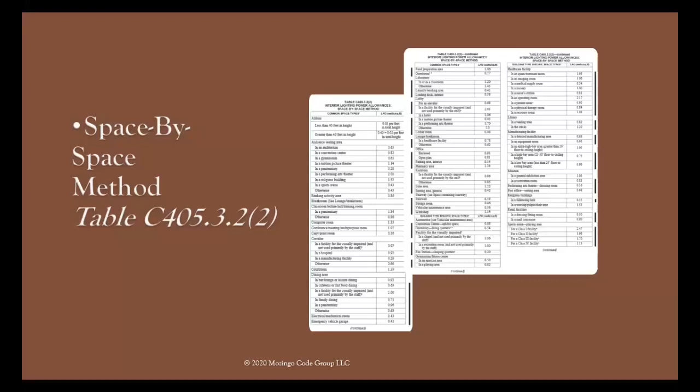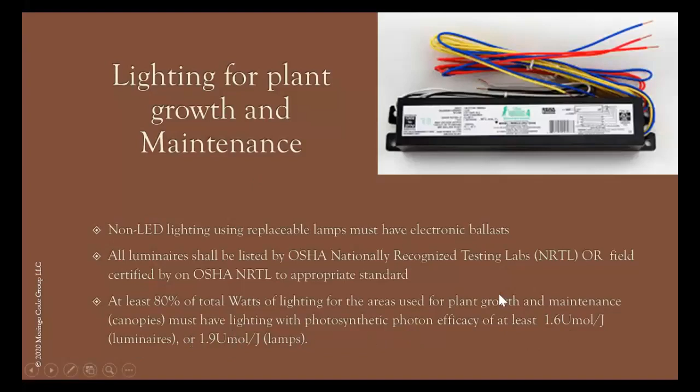Lighting for plant growth, again, such great work with the industry out there on this to come up with these rules about lighting. So if you have non-LED lighting, you have these electronic ballasts, right? And your lighting is in line with nationally recognized standards, and you have some pretty high efficacy lighting, and it's not a watts per square foot. We're talking about moles here. It's a different lighting for plant growth. It relies on a different type of lighting, and still making sure that type of lighting is efficient. So great work with the industry to get these requirements in there.

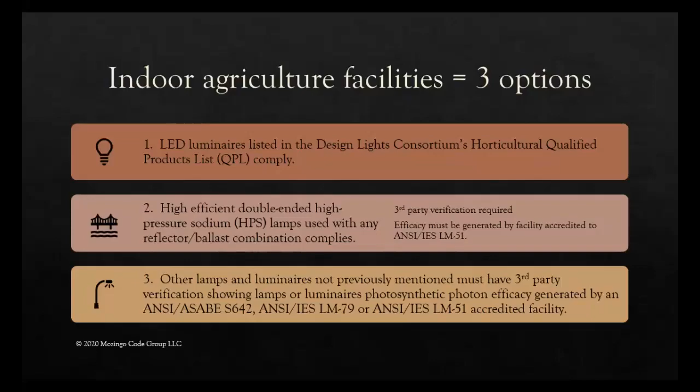You have to have your LEDs. You have to meet the right standards. And it does say, other lamps and luminaires not previously mentioned must have third-party verification showing that they meet the right standards. That's a lot of light. Those grow facilities, those indoor agriculture, they use a lot of light to grow their plants. And the code has always had plant growth lighting amended out. We want to get some of that efficiency, but we have to do it in a way that won't hurt the industry. So all of that was taken into consideration. Great job on behalf of all the parties there to get that in there. I'm hoping that we can take that to the national level.

Electric vehicles, this is in the code. It's in the 2021 also. It was being appealed, but it's not going to come out, I don't believe. So as of Friday, I don't think it's coming out. So it's going to be in there, and Denver's going to have it. Almost every jurisdiction that I help do code adoption wants EVs. They want it in their sustainability programs, and they want it in their code somehow. So they're all taking either Denver's language or the national language and putting it in their code, even if they're going to skip the 2021. So I find that encouraging, and I applaud Denver for leading the way on some of this here in Colorado.

So you're going to have EV charging there for new construction and level 3 alterations. So make sure you know what those level 3 alterations are. It's a defined term.

So making sure that you have EVs. There's a lot of definitions to remember about that. There are Group R occupancies, your R1s, your R2s that are all commercial, R3s and R4s over 3 stories, and then all your Group R1 and R2 have this requirement that Group R occupancies with 3 or more dwelling or sleeping units shall be provided with EV charging in accordance with the table, so we'll look at that table.

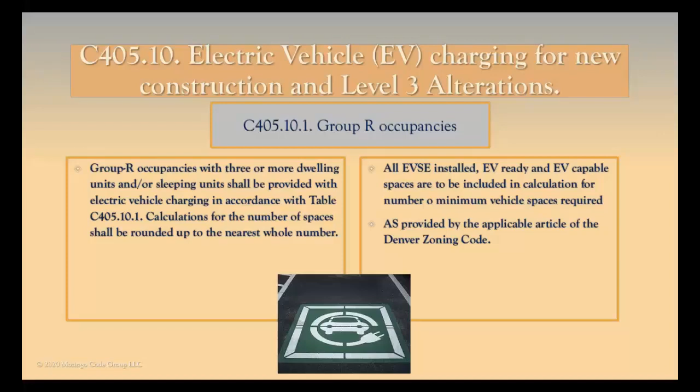Typically, the building inspector isn't out there counting parking spaces, but maybe you're not going to have to count parking spaces. You're just going to have to make sure that they have their appropriate amount that's in there.

So you had the Group R. Now you have the Group A. So A, B, E, I, M, and S2. So that would say that, okay, well, if I'm an F or an H or any other S or whatever, maybe this doesn't apply to me. So provide electric vehicle charging in accordance with the table. Again, we'll look at that, calculate your number to the nearest number. So if you come up with needing 3.4 spaces, you need 4.

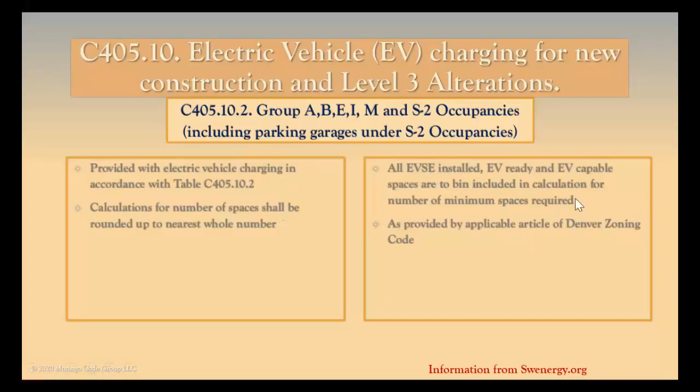All EV supply equipment installed, EV ready, capable. Calculate the number of spaces as provided by the Denver Code, the planning and zoning.

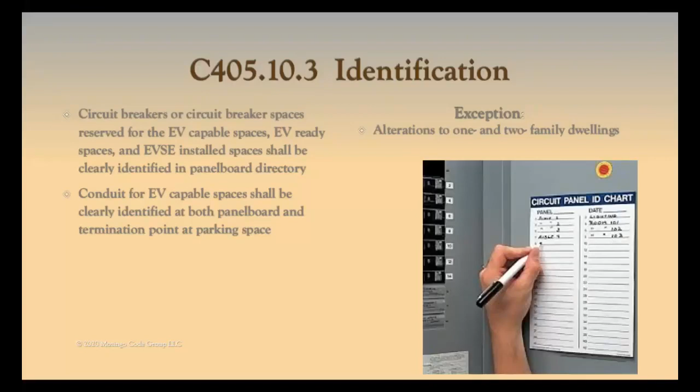All right, circuit breaker identification. When you're doing this EV ready, circuit breakers or circuit breaker spaces reserved for EV capable spaces, EV ready spaces, and installed spaces have to be clearly identified on the panel board. Conduit has to be identified at both the panel board and the termination point, and there are some exceptions for 1 and 2 family dwellings in there.

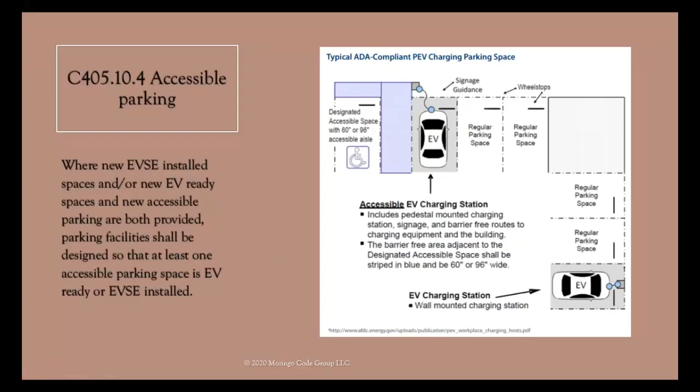So it's also letting you know that you have to take into consideration accessible parking. You can't put all of the EV ready outside of accessible and/or inside accessible. If you're only required one, where are you going to put it? If I put it in the accessible parking spot, then nobody else has access to it because they're not allowed to park there. If I put it outside, then the accessible people won't be able to access it, so you have to really consider this. It says at least one accessible parking space has to be EV ready, so even if you're only required to have one, you might end up having to have 2. Or I have seen diagrams where they put it right in the middle, but I don't know that that would be acceptable. So some things to think about.

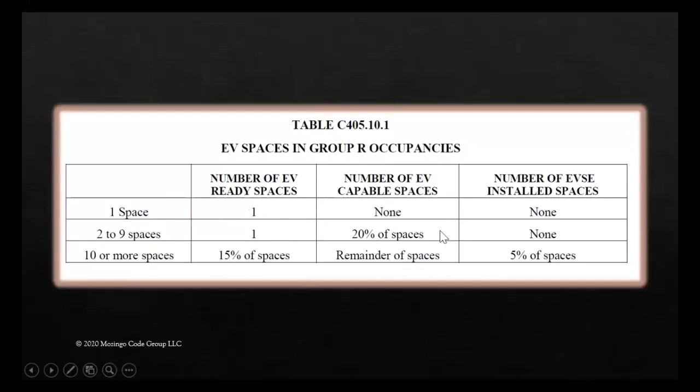EV spaces in Group R occupancies - this is the table that says if I have one parking space, I need one to be EV ready. I don't have to do capable and installed, I have to have it EV ready. 2 to 9, I need 1, and then 20%. If I have 10 or more spaces, 15% of them have to be ready. Everything else, 5% have to be installed, and then the rest has to be capable. So just knowing that you have this requirement in there, and this is for your other occupancy.

So just knowing that's in there. Then we go to 406, just reminding you. We're out of lighting and into 406. This is that additional efficiency package options.

You have to choose 2, right? So if you choose reduce lighting power density, the lighting power calculator is 10% more efficient than if it was just done to 405. Yours is 30%, because the lighting in the code hasn't caught up with the technology, so going 10% doesn't mean anything. So in Denver, the requirement is 30% more efficient for that. Just making sure you know that requirement is in there.

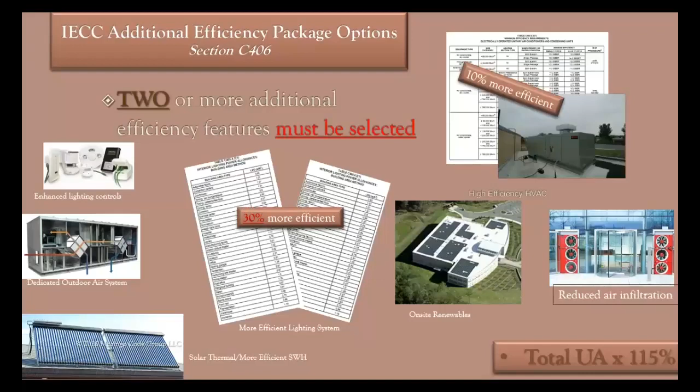Then if you're a tenant space, which one do you choose? Denver has identified that if I'm a tenant space, there are certain ones I can't choose, but I could choose more efficient mechanical equipment, more efficient lighting, more efficient digital lighting, dedicated outdoor air, or reduced hot water system. It's not giving you the envelope allowances because the envelope is already done by the time it's a tenant space, right? It does allow you to do renewables as long as the entire building complies, not just that tenant space.

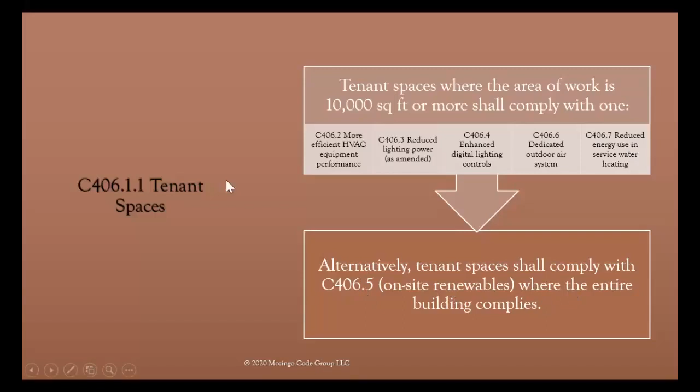So just looking at tenant spaces in C406 and how that works. And then 408, just remembering on commissioning, I want to reiterate that lighting controls have to be commissioned.

We do have an opportunity in the future to do just a webinar on commissioning. And in fact, when we get to additional resources here pretty soon, we're going to see that you have access to any webinar we've ever created. So I know there are some out there on mechanical and on commissioning, just making sure you know those are out there.

But it's really important, commissioning - it's definitely for mechanical and service water heating, but I think a lot of people forget that commissioning is required for lighting controls. And it's so important because we still don't know who's going to look at all of that or whose job it is to do it.

And I just want the designers in this training to know we are going to be looking at that lighting. It's a requirement in the code even outside of Denver, so that's not new to Denver.

But what is new is that Denver has an exception that says lighting systems are exempt from functional testing requirements in buildings where installed lighting load is less than 20 kW - you like that extra W - and the area is less than 10,000 square feet. So that is for Denver only, right? Just making sure you know that.

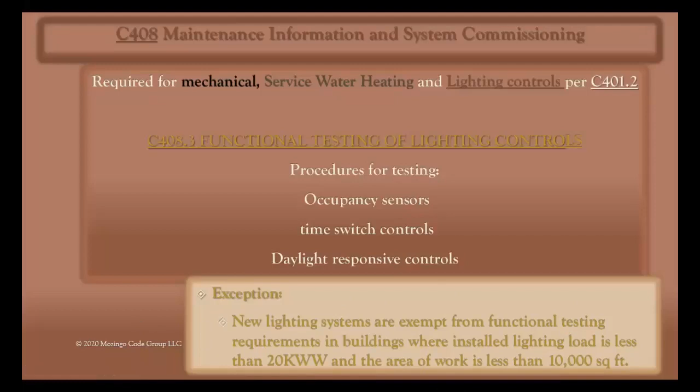And here's Denver's checklist. In 408, they have a checklist in the code. Denver has modified it a little bit just to get more specific for Denver, but lighting controls is on there. Water heating controls, economizer controls, HVAC controls, everything is on there. Do I have my preliminary report? Do I have my final report? So making sure that you're getting this checklist.

The nice thing about the checklist is that it's one thing in the mix of all these commercial buildings that have totally different paths of compliance, totally different codes they're using, and even if they use the same compliance path, nobody turns in the same kind of documentation. It's nice to have just one thing out of the whole project that will be the same for every project - I know how to read this report because it's the same report I read for every single project. So it's nice to have one thing, I think, in the inspection process that's easier to do.

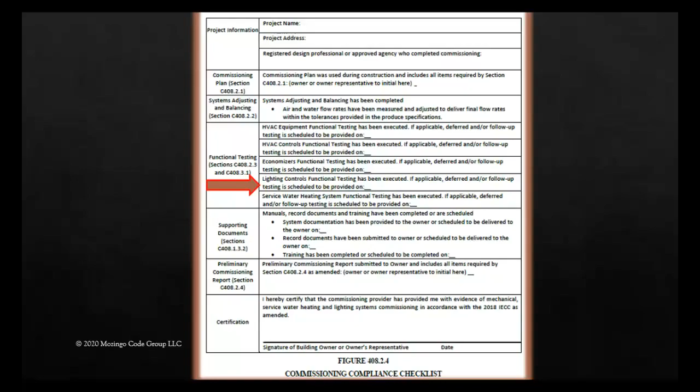I know that was a lot to go through, and we didn't dive into anything excessively. It's really hard to do when you have to cover a whole code in 2 hours.

So I brought up the things that I find make the most difference in commercial buildings, based on research studies. Again, totally applauding Denver's efforts. It doesn't matter if you agree or disagree with what they put in there. The process they used to get everybody's input, opening it up to the public, and continuing this process of wanting everybody's input and wanting to do what's right for everybody is just amazing. I'll tell you right now, not very many jurisdictions do that. Huge kudos to Denver for putting together something that meets people's needs, meets the environment's needs, and is actually written in language that's understandable and doable.

So good job, Denver. That's all I have. If there's some questions or anything, Erica?